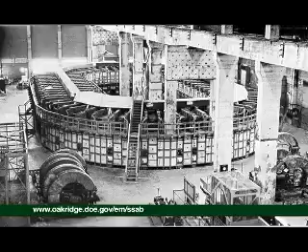The research and national defense facilities of the Oak Ridge Reservation are vital parts of our nation's scientific community. To continue to meet these needs, parts of the reservation require cleanup from the impacts of years of energy research. The Oak Ridge Site-Specific Advisory Board is the voice of the community, providing input to the U.S. Department of Energy on its environmental cleanup of the reservation. To learn more about this important work, you're invited to attend meetings of the Oak Ridge Site-Specific Advisory Board.

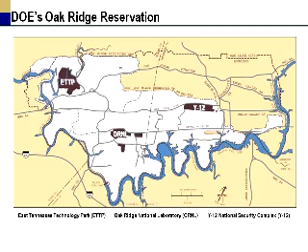Just a brief history. ETTP, K-25, formerly K-25 site, construction was started in the early 40s, 1943, on K-25. At the same time, you had work going on at Y-12 to construct the Calutron. You also had at ORNL the graphite reactor. All this was in a race to try and produce the atomic bomb.

Permanently shut down in '87. The actual facility, K-25, stopped enriching uranium in '67, and it was used as a purge cascade for reactor returns, and I'll get into that.

Around 1998, the SSAB developed the end-use, set up a team, the end-use working group, and they came up with recommendations for DOE as to what various sites on the Oak Ridge Reservation would be used for. For ETTP, it was decided that it would be a commercial industrial park to support private industry. And in 2000, DOE sat down with EPA and the state of Tennessee, and we agreed on that end-use, that it would be a commercial industrial park.

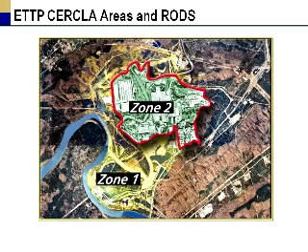With that, we defined two areas, Zone 1 and Zone 2. Zone 1 is 1,400 acres, outside the former production area, light industrial, open area. There were a few disposal areas, burial grounds, etc. Zone 2 was the production area inside, behind the fence, where all the process buildings were located. So our approach was, let's go out into Zone 1 and start cleaning it up, while inside Zone 2 we were demolishing buildings so that we could have access to contaminated soil and groundwater.

These are just a couple of photographs of early cleanup actions. The 1070-A Burial Ground is located in the northwest corner of Zone 1. It's approximately 1 acre, and we had to dig down 15 to 18 feet to remove buried materials in that area. The top right photograph was an early action.

We referred to it as the G-pit excavation. If Connie was here, John would know. And of course, let's see, Robert Jolly, Angel, Tom Gephardt. This was an early action to exhume materials, mainly solvent - drums of spent solvents and degreasers that were buried.

This area of the site is located on the eastern edge of the Zone 2 area, inside Zone 2, near the 1070 CD burial ground. I don't know if I'll point that out.

And then in the lower right-hand corner, John knows about this one, we put in a grout wall and a series of extraction wells. The intent was to prevent contamination from the site from flowing into Mitchell Branch, or if nothing else, slow it down. The Mitchell Branch, of course, flows off-site.

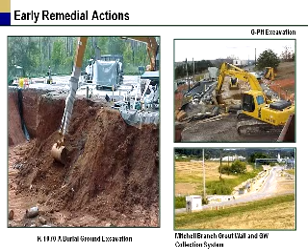In addition, we removed over 46,100 tons of scrap metal from down in the powerhouse area. That area is now clear, and there's one small area that we still need to touch on, and I'll show a picture of that.

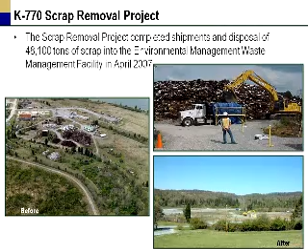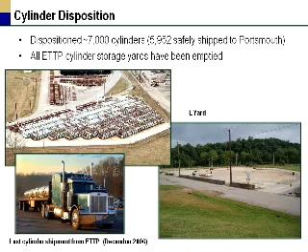Many of you who have been around, like Norman Mulvaney and Susan Garawecki, you remember all the cylinder yards. We had 6 cylinder yards, over 7,000 cylinders, just like you see in the pictures of Portsmouth and Paducah. All 7,000 cylinders were safely shipped off-site. 1,000 were direct disposed, and 6,000 were shipped up to Portsmouth in support of the depleted uranium project up there.

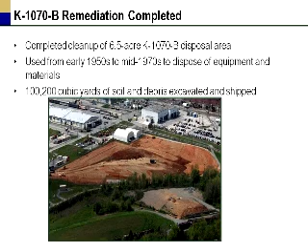Most recently, we completed excavation and remediation of our last burial ground on site that needed to be cleaned up, the 1070B burial ground, which is located adjacent to and east of K-25, on the northern edge of the site.

Okay, as far as the Zone 1 and Zone 2 remedial cleanups go, green is a good thing, right? Hatched green is even better. The hatched green is all this stuff in here, which means that EPA and the state of Tennessee - we've submitted our reports and all the data, and they've agreed that no further actions are warranted in these areas.

The small area down here, there's a 7-acre area down in this area of the powerhouse area, where back in the early 40s, when the original power plant was located down there, they had about 6 to 8 diesel fuel, bunker C fuel storage tanks that had asbestos blankets. Those were stripped and just disposed of, excavated and buried on site down there.

So we've got an area down there that we've got to work with EPA and the state on the final remediation for that area. DOE's probably going to propose that we just cap it, but that will be another proposed plan feasibility study, and the public and everybody will weigh in on that decision.

So as far as the acreage goes, we started out with 2,200 acres in total. 1,500 acres have been cleaned up. The vast majority remaining is in and around the remaining buildings that exist on site.

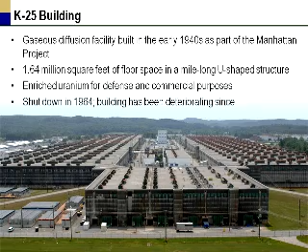Construction started in the early 40s. The building was shut down in '64. Everybody knows, if you've ever looked at houses, if you shut down the heating and air conditioning system and go away on vacation for 2 or 3 weeks, when you come back it just smells musty. It's not the same.

This building wasn't heated or air conditioned, and it sat there — you're looking at a 44-acre roof. We didn't move out on demolishing it because at the time nuclear engineering was saying it may be needed. So we just let it sit in a status condition with little to no maintenance.

The last time the roof was replaced was in '79. As a result, infiltration of water, et cetera, caused the building to get into very bad condition. Many may remember in 2006 a worker on the ops floor — I'll point that out — fell through the floor, fell 29 feet. He was severely injured but survived. As a result, we had to change our demo approach.

This shows the building — with the light there, you can't really see. In July of 2011, we started to segment. You'll hear the term Tc-99 area versus east non-Tc-99. The Tc-99 area is the southern end of the east leg of K25. It's 5 units, so what we did is create a buffer zone.

So what you're looking at right there are 6 building units. Each building unit is approximately 400 feet in width, 65 feet high, and about 100 feet in depth. That shows where we were.

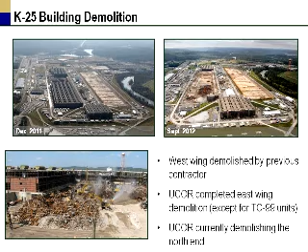You can see in this photograph, taken in September this past year, this is all that remained. Of course the west wing was demolished by Bechtel Jacobs, the prior contractor, but at this point this has been demolished. This unit — there are 3 units there — and you can tell this is the center of the unit, 1, 2, and 3.

At this point, everything on the north end has been demolished except for this one little corner area, which will be completed this month. This shows you when we started, October 24th, with the demo.

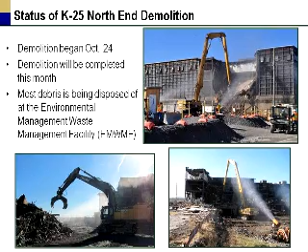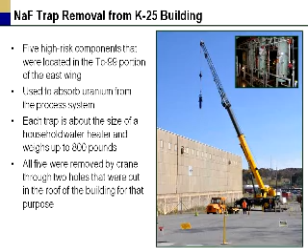One of the highest risks identified was the sodium fluoride traps — we refer to them as NaF traps — located in the Tc-99 area. Those 5 NaF traps have been purged. The concern was that they may contain hydrogen fluoride. They've been purged, removed from the building, and are in safe storage. We're developing a plan to go in and characterize the NaF traps so we'll know what to do with them.

Another significant accomplishment — if we hadn't achieved agreement on the memorandum of agreement with the signatory parties, consulting parties here in August of 2012, we wouldn't have been able to initiate demolition of the north end. That was done, and the slab will be maintained as a historic site.

We'll construct a facility that looks similar to the inside view of the K-25 building, with the ops floor — where the operators were located — the pipe gallery, and where all the equipment's located. There'll also be a viewing tower, and I know Sue Cange was instrumental, along with Dave Adler, in achieving this.

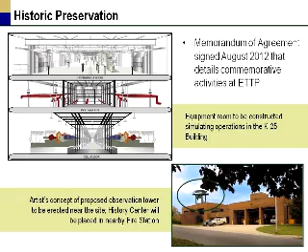The K-27 building — it's a good thing now — is 9 units. What remains on 25 is only 6 units, so now K-25 is actually smaller than K-27. K-27 is 9 acres in size, with 9 building units.

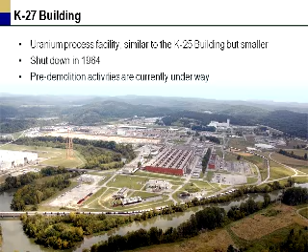K-25, when they started construction in '43, we were in the middle of the war. So not to say they cut corners, but they cut corners. A lot of the rebar was smooth — it didn't have the gnarls on it. When they ran out of aggregate, they used river rock, because we were in a race to get the building up, constructed, and operational.

With K-27, they improved the construction technique. In K-25, we had precast panels on the ops floor — a kind of spun concrete mixture with wire mesh inside of it.

That contributed to it once we started, and it had kind of a rubbery tar mat over the top of it. As soon as that tar mat got perforations, you had leakage of water. The water then soaked into the concrete, and the wire mesh started to deteriorate, and that's what contributed to the guy falling.

In K-27, we're still walking around. Steve Dahlgren and I toured K-27 several months ago, and it's a solid poured concrete floor versus a concrete panel. In addition, when they went to 29, 31, 33, they reversed the flooring. In 25 and 27, the operators were on the top floor, and all this equipment produced a tremendous amount of heat. It was difficult to keep the workers comfortable, so in the latter, post-war buildings, they flipped it around. All the equipment's up on the top floor, and the operators were on the first floor, so you get a lot of cooling coming in from outside.

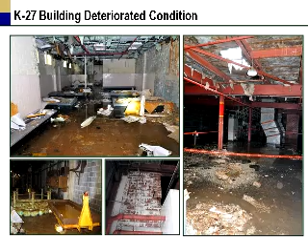They mentioned that they're following the same process. So Steve and his crew, he's got them going in there venting, purging, and draining. They're doing some NDA measurements, which we need to do. It's a system that we've set up working with the state of Tennessee and EPA, and the process we go through, and they're doing intrusive sampling.

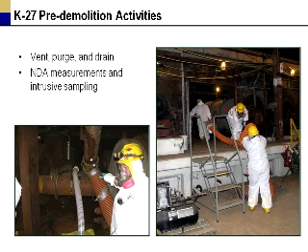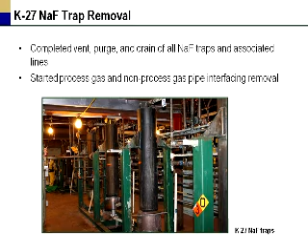We've got 5 NaF traps on K-25. We've got 6 NaF traps in 27, and these NaF traps, K-25 enrichment was greater than 20%. In 27, it's less than 20%. So these are not to be treated lightly, but they're not as high a risk as they are on 25. Steve's already got the planning underway. The 6 NaF traps, like 25, same process, will be pulled out of the building and put into safe storage.

Okay, this is just a quick show and tell on all the demo activities, like the RA activities. 1401, and I'll identify it here on a sketch or a map that I've got. 1401 was over 400,000 square feet, and it was demolished. 1420 building was where they did maintenance on converters, located in the northwest corner of the site, demolished. Cooling towers over by the 3133 building, demolished and disposed. Lab area located just west of the high bay area, the centrifuge facility, demolished.

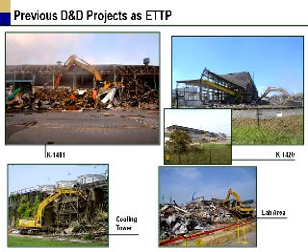K-29 was the first gaseous diffusion building in the DOE complex to be demolished. The steam plant used to produce steam for every building and facility out there. Now that we're converting it over to a private industrial park, we tore that down, and every lessee tenant has to provide their own steam and heat and air. We've demolished the small water tower, the checkerboard water tower, located just southeast of 31, still exists, but we're planning that demolition. And then 1320 was just an admin building.

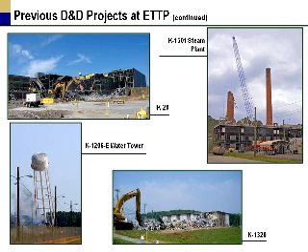Okay, I'm going to spend a little time on this. Yellow is a good thing. Yellow means I'm putting myself out of a job, because when all that map is covered in yellow, then I can go home, for the most part. And right, Mark?

I mentioned a lot of buildings, and I don't know how many of you know where they're located, but this is 32 building, and it's demolished. These are all the cooling towers that were demolished. 31 building is demo ready. Many of you recall there was an effort in the 2004 timeframe we refer to as the 3-building D&D job, and all of the process equipment inside 32, 31, and 29 was removed. So these are just shells.

29 building, again, was the first building to be demolished. Demo activities are underway inside the 27 building and in the tech area of K25. Most of the north end has been demolished. We've got maybe 40% of the building left, and it'll be down, should be down in about 2 weeks.

I mentioned the 1401 building, over 400,000 square feet. These are the change houses. This is the lab area, and these are just ancillary facilities. That building right there was the original Manhattan Engineer District building, the 1001 building. For those of you that have seen military bases, it just looked like the old kind of Army base.

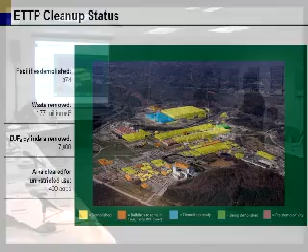I guess that's it, that's the end. So, I mean, I kind of see light at the end of the tunnel. If I think back to what Norman said when I was at the lab in '97, you saw the photograph, the aerial of the site, what it looked like when I came to the site in 2000, and then you look at this photograph right there. A lot of work's been done. We're close to being finished.

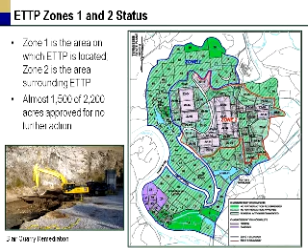Let me go back to this slide, this might be easier. Okay, we're in the process—this area right here is where building 33 is located. We're collecting all the required data and information to provide to the state of Tennessee, and eventually they'll hopefully say no further action is required. So we'll put green hatches over that area, what we call exposure units, where the 33 buildings are located.

Once we get the clean bill of health, we go through the process to transfer it over to CROET. This area here has already received no further action from the state of Tennessee. We're now in the process of doing independent verification—you may recall the SSAB wanted independent verification. Currently ORISE does that for the Department of Energy, and will agree with the results, then we'll transfer that property over to CROET. Once they own it, they can construct a facility there.

Now in an area like down by 27, the Department of Energy won't transfer that area because we still have cleanup required there. So does that answer it? It does, okay, it does.

Mr. McKinney? Yes, thank you. Looks like a nice place for a landing strip, doesn't it?

Yeah, so we've been so fixated on the above-ground side out there with all the demo and so on going on, and very little has been said—at least in my experience—about the underground side, and you kind of opened it up with the ROD and the groundwater issues.

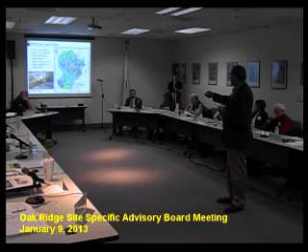We're not anticipating any significant contamination beneath the K-25 slab. The real problem was in a couple facilities just east of K-25, and the 1401 building was the major maintenance facility where they discharged a lot of material out of that line. The plume itself wraps around and runs towards Mitchell Branch and then down this direction. So up under K-25, crossing our fingers, not a lot of contamination, but we'll still go through the characterization process to demonstrate that.

Okay. Do you have another question? No. Ms. Martin, do you have another question? Okay. Mr. Hedger.

There used to be a chromium-6 and a technetium-99 problem there, or at least it was perceived to be a problem. Are those being remediated to the point where they're no longer a problem there?

But the groundwater contamination in there, well, I'm not aware, I don't know. Dave, do you know? I haven't heard there's a technetium problem there, it's really soluble in water. Check, Bob, but my understanding is that the technetium issues were actually associated with contamination on building structures.